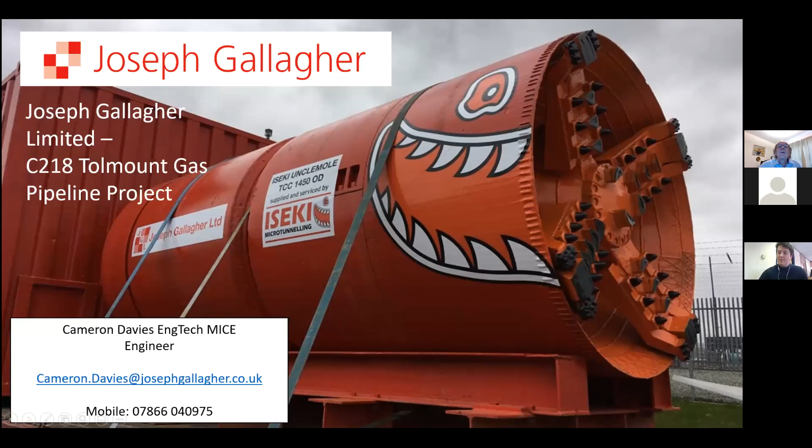Thanks, Norman. Hello, everybody. Thanks for taking the time to join this webinar today. We're going to talk about the Tolmount Gas Pipeline project up in Easington in Hull, and I hope you enjoy it. So just to run through the slides - a background of the project.

The Tolmount Gas Pipeline project is within the Centrica gas terminal on the eastern edge of Hull. JGL's package worked within a design and build contract with Saipem as our client, and Premier Oil as their client above for the main infrastructure. Our works were to install a segmental 5.5 metre diameter shaft down to 22 metres, and then there were 145 metres of pipe jacking at 1200mm internal diameter.

The works took place over 3 distinct phases. Prior to Christmas 2019, JGL undertook and sank the 22 metre deep shaft, completed and back grouted on departure. In March 2020, during the start of the COVID pandemic, we chose to continue and carry out our 1200mm pipe jack from the shaft, into the cofferdam out towards the North Sea, which was installed by others. Lastly, in January 2021, we finished the final completion.

There was a pulled pipeline in from the North Sea that we grouted successfully.

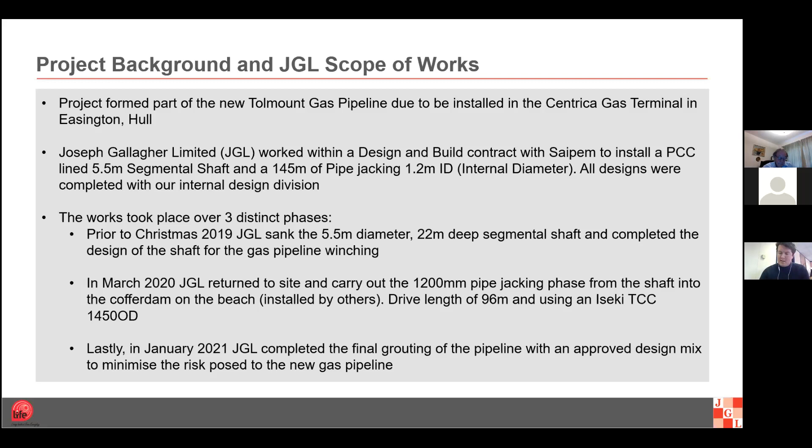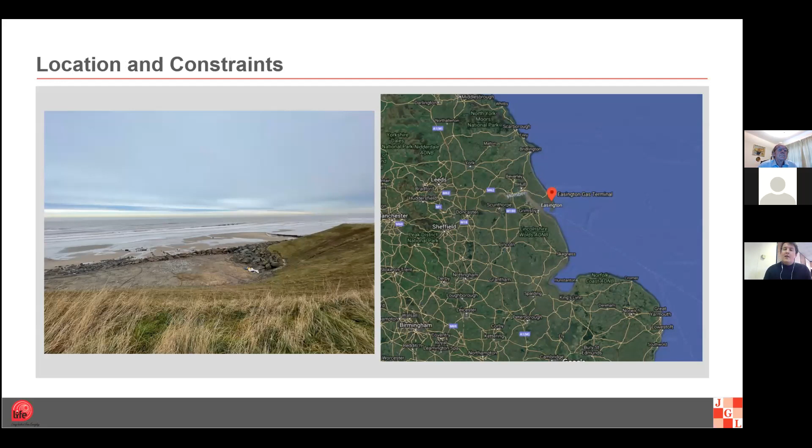Project location and constraints: the project was in Easington, 45 minutes east of Hull towards the North Sea. There's really only a single track route in and out of Centrica there, so logistics was a problem.

It was working within the Centrica gas terminal, which is a tier 1 COMAH site, so it's very looked after and disciplined. There were lots of inductions and restrictions on phones and anything that causes sparks. It was a very different site compared to what we normally do, so it was a good challenge.

There was a large permit system in place with Centrica, with a lot of pre-work for documentation and approval of the works. This was all completed by JGL and submitted to Saipem, then submitted onto Centrica, so there was a clear process throughout.

For plant and equipment, the electrical plant on site and anything used within the shaft had to be intrinsically safe. Adaptations to plant and kit, such as excavators, had the chalwyn valve and spark arrestor. This was an addition that our company, NRC Cranes, was able to retrofit onto the plant sent up for the work.

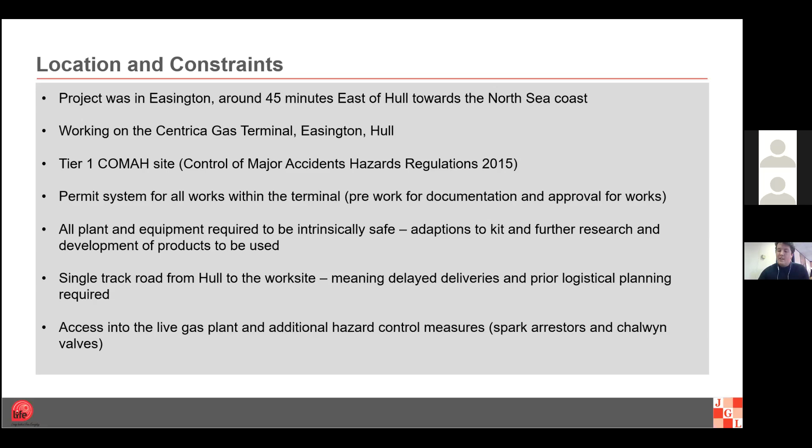As mentioned, there's a single track route from Hull to the work site, so deliveries could always get stuck behind a bus or something slower, which was a bit of a pain sometimes. The spark arresters and additional control measures for the COMAH tier 1 site were also placed onto our pieces of equipment.

The tunneling GI and design was all done by JGL's in-house design team, based in Leeds. The deliverables were the following four: the shaft design, including the collar and flotation, and the shaft sheave base block for winching of the pipeline.

You'll see in one of the photos the pipeline, which was originally designed to be winched from the cofferdam in. It was quite a size, the sheave block, as you'll see in the coming photos. There was also a backwall design for the jacking frame for micro tunneling, standard stuff within JGL, looking at the thrust forces onto the wall.

Lastly, we did very good work with the grouting specification for the mass fill of the tunnel drive with the product pipe within. This pour was completely underwater, so there was a lot of pre-work done to ensure and quality assure that the grout wouldn't displace when placed into the North Sea water.

These designs were all checked in-house, and we were able to offer professional service and advice to Saipem. There were a lot of technical queries and questions from both Premier and Saipem that we managed in-house, very much a full turnkey package in terms of design and construction.

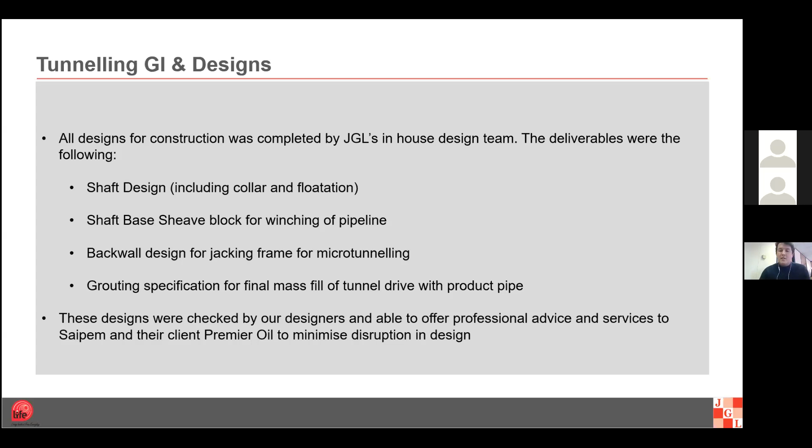Looking at the initial designs and GIs as a relative example: on the left-hand side we have our 5.5 meter diameter caisson shaft, with a tunnel slope of 0.7 degrees going down to the reception pit by others on the right-hand side, which was a cofferdam within the sea. Most of the ground was stiff to very stiff clay.

At the last bit near the beach, by borehole 04, there were protection measures for erosion of the cliff placed in there. JGL managed to come up with a solution where we were able to miss the rocks that had previously been placed there to stop the erosion of the cliff face.

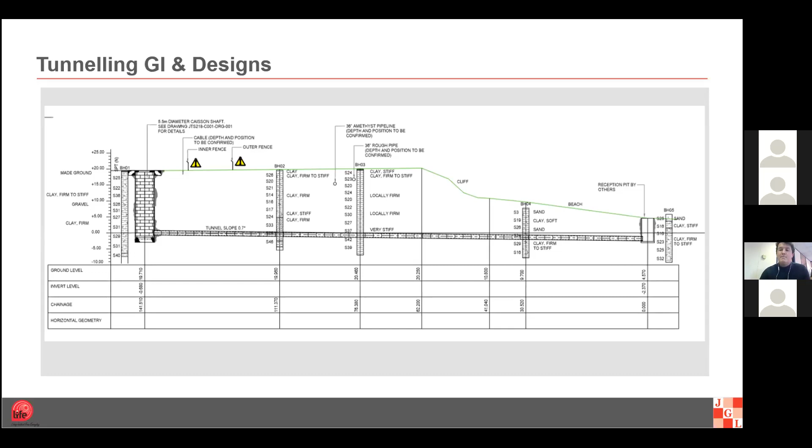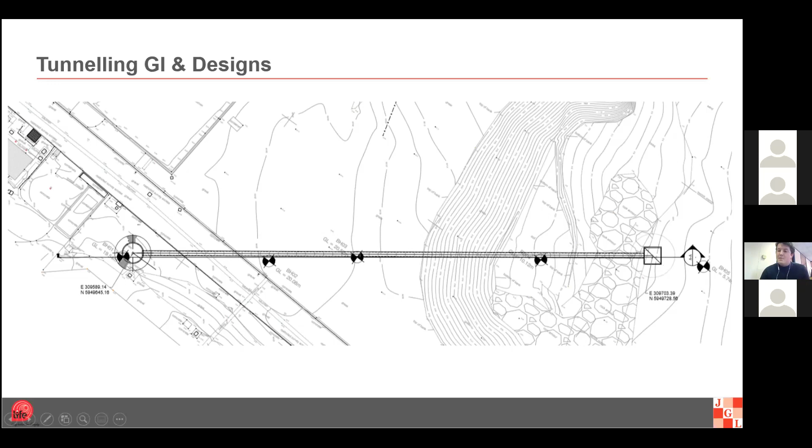Here's an overview of the tunnel drive itself. On the left-hand side is our drive shaft within the gas terminal, with 2 layers of fence either side for security. You've got the layout of the boreholes going all the way along to the beach, and on the right-hand side you can see the rock armor we looked at during our designs, along with the cofferdam that was placed in there.

So TBM selection was all in-house within part of the JGL group. The TBM was supplied by Iseki Microtunneling, and the TBM of choice was the TCC 1450 OD, which is an Unclemole micro tunneling machine.

The TBM was chosen due to a large amount of stiff clay within the drive geology. It wasn't a rock face machine, as the ground wasn't found to be hard enough to warrant one. That's why we had to look at the rock armor at the end, but we made the decision that it wouldn't be any issue to the drive.

One interjack system was designed into the drive to push around halfway, just to give it the final push to the end on the 96-meter drive length. As part of the JGL design process, the settlement analysis was designed and checked.

There was also the third party work with the cliff and going into a cofferdam, done by others. So there was good collaboration between the whole project, between all involved, and also the external contractors doing the cofferdam for Saipem.

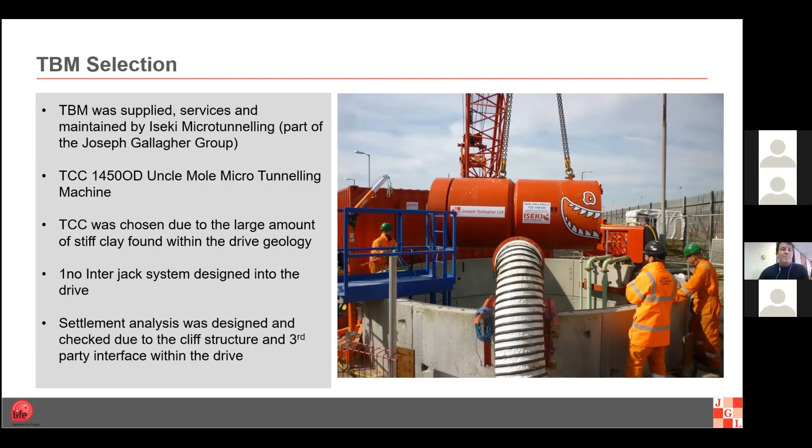There's a nice photo of it looking very clean on the way into site. It didn't look like that at the end, I can assure you, but it looks very nice in our photos.

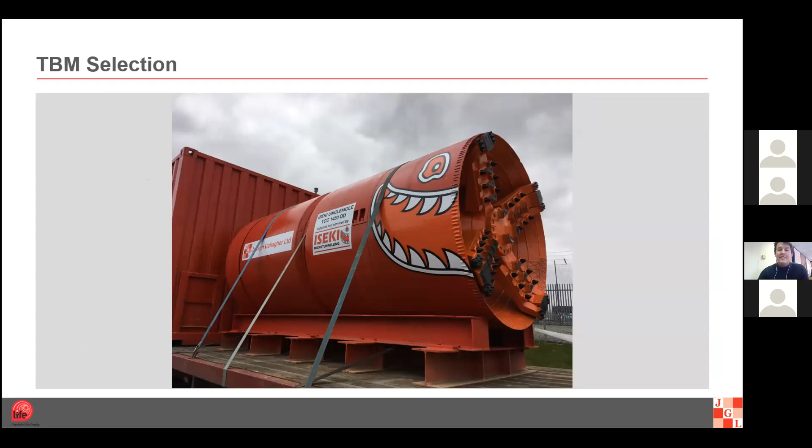The main shaft was dug using JGL's 34-ton telegrab excavator, which you'll see on the next slide - you can just see it in the top right-hand side of the photo. That was able to extend right down to the 22 meters depth, and then it was bottomed out with a 5-ton excavator to get the under ream for the sheave block.

Install of the sheave block was part of our shaft works originally, so in 2019 this was part of our works. All the shaft sinking equipment and cranes were provided by Specialist Plant and NRC, all part of the JGL group again, so it's all encompassed within one.

We provided everything from our own. NRC was able to retrofit chalwyn valves and spark arresters to suit on site, which saved a lot of time and effort with going out to externals. We were able to do that in-house, which is very good.

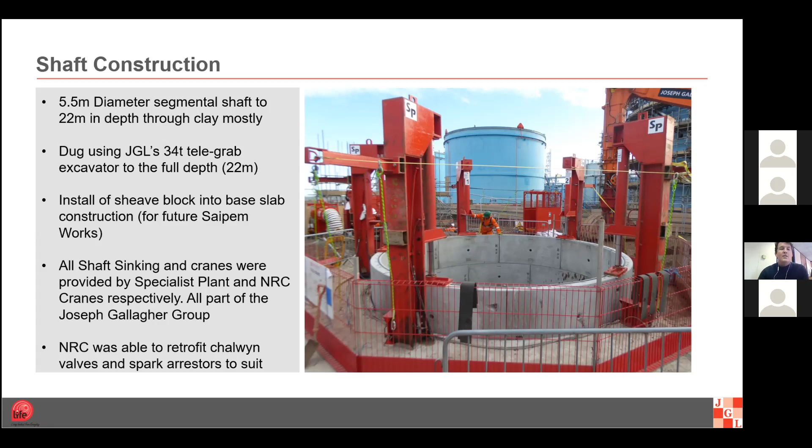On the left here, it doesn't really do it justice, I must admit - it was much larger when it was in person, I can assure you. So that was the sheave block there.

This was the initial frame that the winch was going to be installed upon. On the right-hand photo there, the top plate's been taken off - there was another plate to go on top of that, cast within the slab. That was a design done by JGL in-house again in our Leeds office.

The 2 I-beams shown across were designed for the 550-ton pulling force used within the winch. Believe me, it was a very complex task lifting that in - I think we had about 20 mil either side of the shaft as it was lowered. So it was a very complex task, which we were very successful in doing.

Again, that was all an in-house design, so it's very different from the norm of putting a sheave block into one of our shafts. But it was good, complex, and we worked with Saipem and Premier Royal to do this design, as it was of such importance to them.

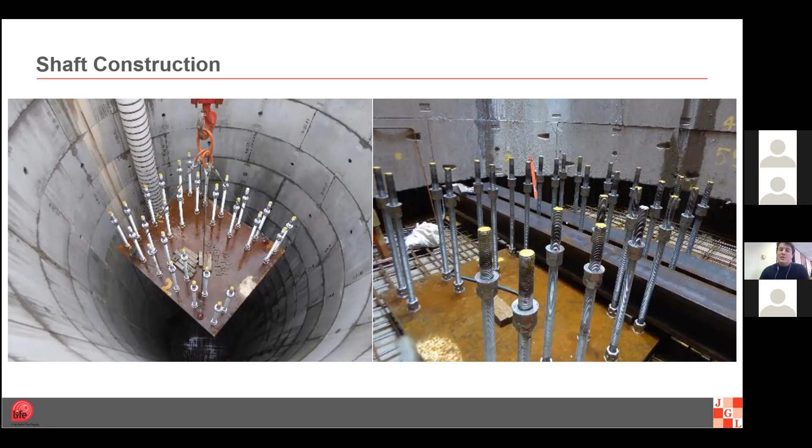On the left-hand side there, like I said, we used the telegrab excavator - that's it there digging. We did find some water within the shaft digging, but again we were able to near enough dig the caisson dry, which is good.

On the right-hand side there is the installed sheave block, or installed plate for the sheave block, that was going to be installed by others. Ace Winches were there for Saipem to install that.

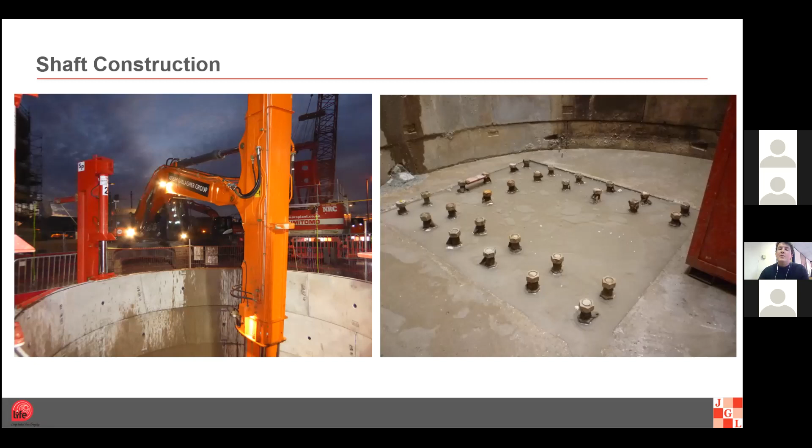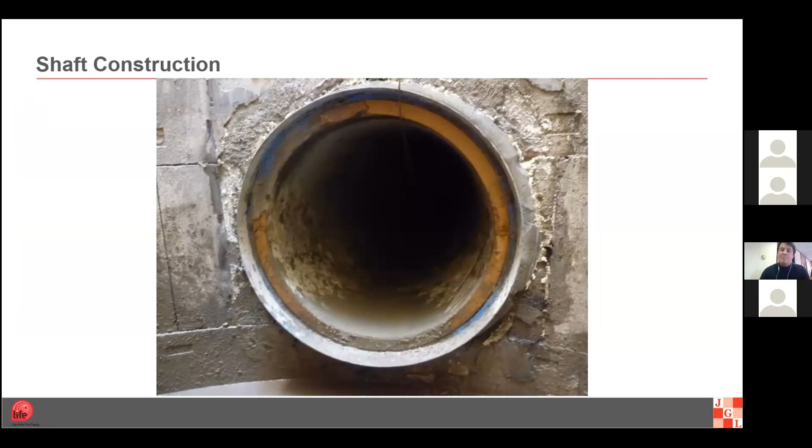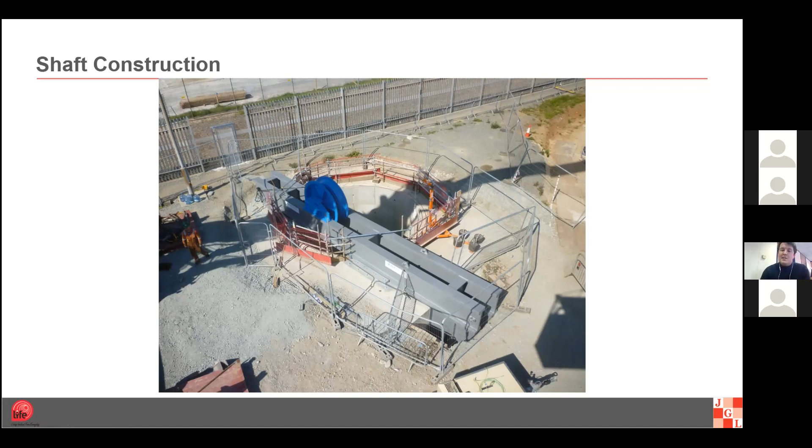That's the top of the sheave block installed. That runs right the way down to the bottom, as you'll see on the other photo. We also installed the two edges here for Ace Winches, off the side of the collar. We designed them for Saipem, so again we were an all-encompassing package. We were able to design all their pulling systems, and Ace Winches were able to install their own equipment.

This is the pipe from the outside looking up. This is the initial work that was done by Saipem to install the pipe into the chamber within Centrica. Adjacent to us, there was another contractor working to do all the receiving parts. We were only due to do the shafts and the tunnel, getting the actual pipe from the North Sea into Centrica's terminal. These bits were completed by Saipem's specialist contractor.

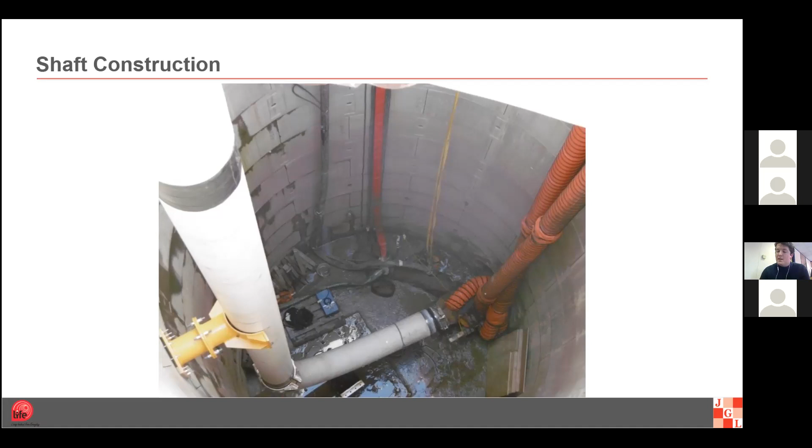Some problems we found, or things we overcame: due to the compound setup and restrictions within the compound, it was very strict on plant in and out. It was very hard to make space, and our room was very limited. So we did actually use a place on the outside - there's a little helipad just outside within the car park. We were able to use this as a microtunneling area and set up our system outside.

Pipes are run - we got the pipes and the slurry lines pushed through some gates that were specially designed to have closer access to the shaft. This was liaised with Saipem, Premier and Centrica themselves. We were once again all working together for the common goal of completing this project successfully.

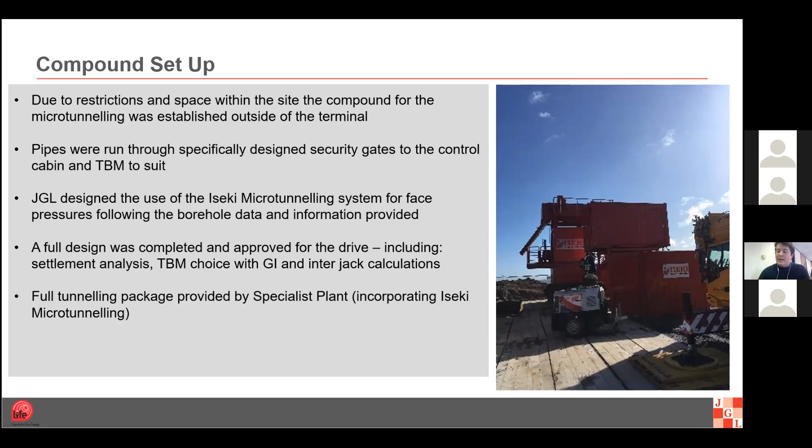JGL designed the use of the Iseki microtunneling system for the face pressures and everything - all that was done through our design. The recommendations of the machine went through the approval process within Saipem and Premier Oil. A full design was completed, and the full tunneling package - all the equipment, the TBM, the slurry systems, the primary and secondary - and all the plant was provided by Iseki and Specialist Plant, again all part of the JGL group.

Some construction challenges - the one at the top there being COVID-19. We started our microtunneling, I remember it very well - I was sitting in my room in Hull when Boris announced the lockdown. It was very much working with the unknown. There was a lot of uncertainty at the time, people wondering whether the world would come to a stop. We persevered though - we had a meeting and decided it would be best for us to continue. We were taking all the measures given by the government at the time, which was very successful. Suppliers was much of an issue, but we worked with it and were upfront and honest about what we had and what we couldn't get.

Another construction challenge was working with the live gas terminal. Like I said, it was a Tier 1 COMAH site, so it was very highly looked at. The MOD police were based nearby, actually opposite - we've seen them a few times. It was a place of national interest, as there would be a large amount of damage caused if the wrong person entered. So there were a lot of permits, procedures and different working conditions that we adapted to.

Weather was an issue with the crane - being that close to the North Sea and on the east side of the country, it's very windy, so there were a few days winded off that we had to work around with the cranes. Sometimes we had a smaller crane, our little 8-ton crane, that could work at a much shorter boom, so it wasn't affected by the wind. We were adapting with what we had.

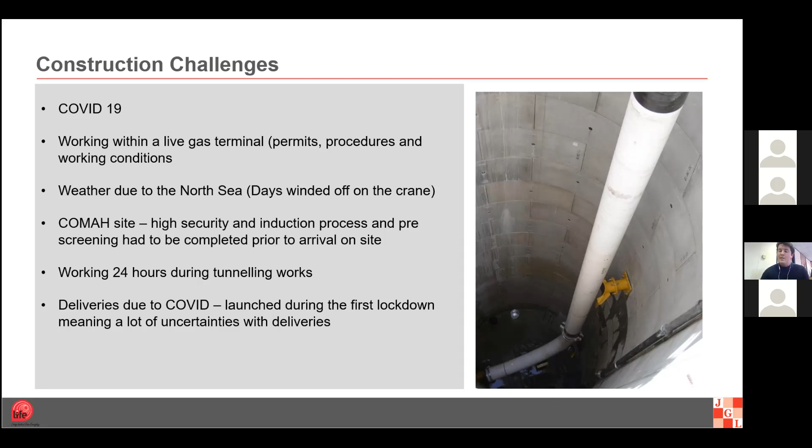So production review: we averaged 3 rings a shift during the shaft sinking phase. That was 3 rings on a 5.5 meter diameter shaft. So that's quite good going.

When we were tunneling, we averaged 4 pipes per shift, so they're 2.5 meters long by 1200 ID. Again, that was good ground to be tunneling in.

It was successful. Clay was found during the tunneling and processed through the primary and centrifuge on site. So the system worked very well with the ground that was expected. Everything was correct in the design. We did very well in that sense.

There was no water loss during the whole drive as well, so the water tank never actually fell empty. The water was kept through and recycled through the centrifugal system.

And lastly, when we poured underwater for the last part, when the product pipe was in our tunnel, we poured 82 meters cubed of specially designed grout within 2 shifts.

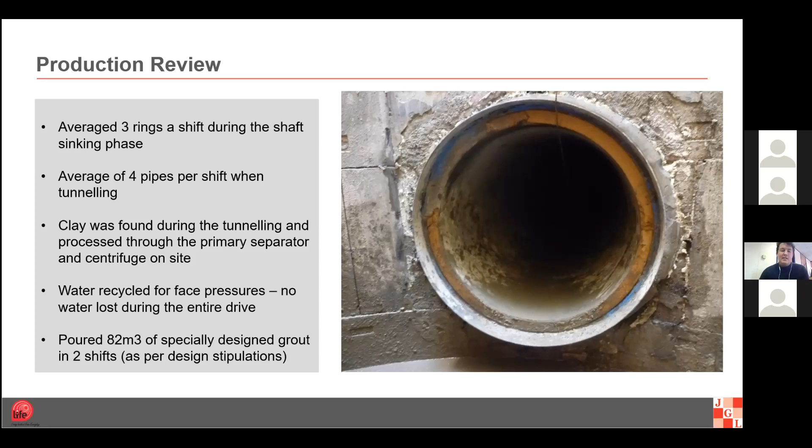Like I said, this went through many design phases and checks with Saipem and Premier due to their product pipe being very highly sensitive to anything. So we had to make sure that it was designed well.

So production review on the grouting works. There was a thorough design for the grout filling of the final product. I can tell you it was a thorough design. It went on for quite a long time, I'll say.

The grout had to be resistive. For the product pipe, JGL designed a specific grout that was poured underwater and provided resistance to the pipework itself.

We sat with a local supplier in Hull, but we worked with them collaboratively from the beginning. We engaged and developed with Saipem and Premier, so there were a few site visits to the plant to actually see how it was going to work. So it set a lot of people's minds at rest.

We were making sure that the product worked, and there was a task-specific method statement for the grouting due to the high nature of the works. The methodology was very detailed for all involved.

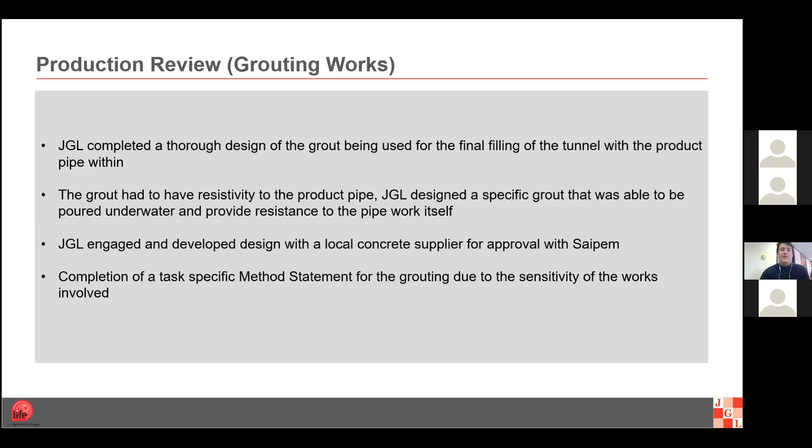That's just an idea of what was pushed. So we had almost like floats on the 4-inch pipe being pushed down the shaft. These pipes floated to the end. It was designed with an NRV, a non-return valve, on the end.

That was pushed around about 100 meters down the tunnel. Then we ran that pipework up to the top of the shaft and poured via a Camfaud pump. This was successful.

Obviously, it's not normally like that to be pouring underwater. This was through our design, and we found that the buoyancy on these were fantastic.

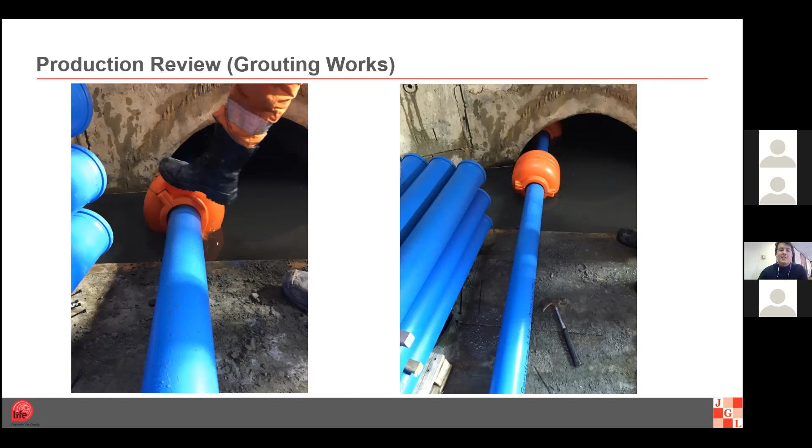That engagement came from a very early stage with a local supplier, and also the suppliers of the pipework themselves, to get their expertise and ideas on what they believed would work best.

This is a snapshot of one of our designs, showing how in depth our design for the grouting was. So the top left shows the plan view showing the pipework and the winch that was pushing it into the shaft.

That almost worked like a sort of catapult. It was pulled back and the pipe was pushed down with minimal force in the end. And that goes through the stages.

You can see in the bottom left photo, the red with the pipework being connected and pushed above the product pipe. You can just see it laying in the invert. On the right hand side, you've got the water coming back up, and that's where we pour. So again, we went into a lot of detail within the design, done in-house, which due to the nature, like I said, was very key for this all to be correct.

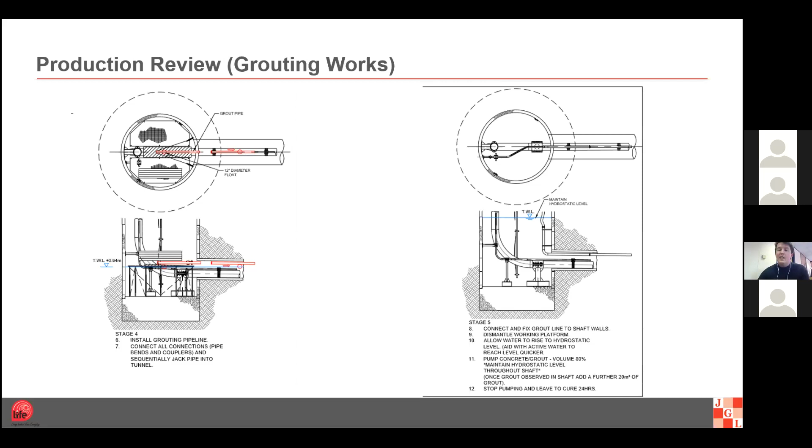So that was the main bulk of our works. Just to go into JGL itself, life was a key part of our business - living incident free every day. It's a key nature of the business and within all of our sites.

We had regular site meetings and workforce engagement which was completed. We always ask, was there a better way to do things? Obviously some designs there could be better ways of doing things, so we asked the question to the site and the people doing it - full engagement from all.

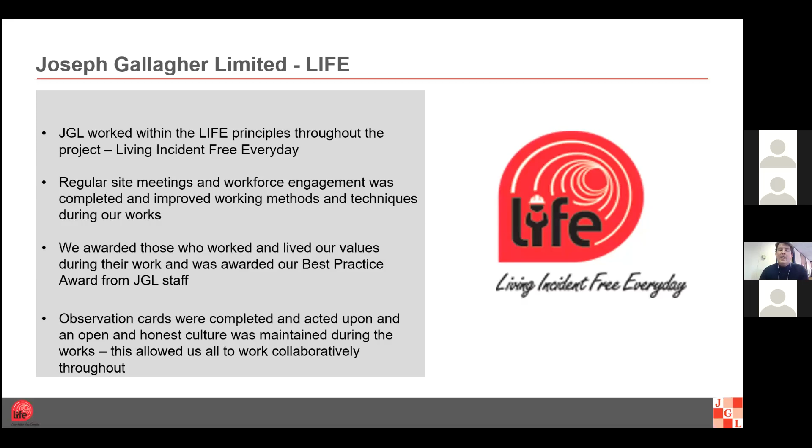We understood it was very new to a lot of people, including myself - I'd never worked within a gas terminal prior. So it was getting people's ideas on what was going wrong, what was going right, and ultimately making our visits very successful.

There's some lovely photos of me through the years. I've got a bit of a worse haircut now, I must admit, compared to them.

So obviously those are the awards we get - a £50 Marks and Spencer's voucher for the operatives that are picked. You can see everyone smiling, pre-COVID anyway, I can tell you all these photos were taken. So yeah, it's rewarding the workforce and noticing good works, maintaining a good working culture within our team.

So in conclusion, JGL was able to complete all the specified work for Saipem - just to go back, that was the shaft sinking, the tunnelling to the cofferdam, and the final grouting and install of the winch sheave base at the bottom. Obviously the grout was completed underwater.

We maintained a strong relationship with the client, and our knowledge and experience meant we were able to overcome various issues arising in a timely and ultimately safe manner, which was key throughout the whole project - being a project that was safe.

Our life culture was driven throughout the project, meaning operatives were rewarded for safe working, and there were actually no incidents within the project, which is ultimately a very big positive.

And the JGL group itself worked collaboratively as a full package. We were able to use all of our divisions within the JGL group to make this project a success.

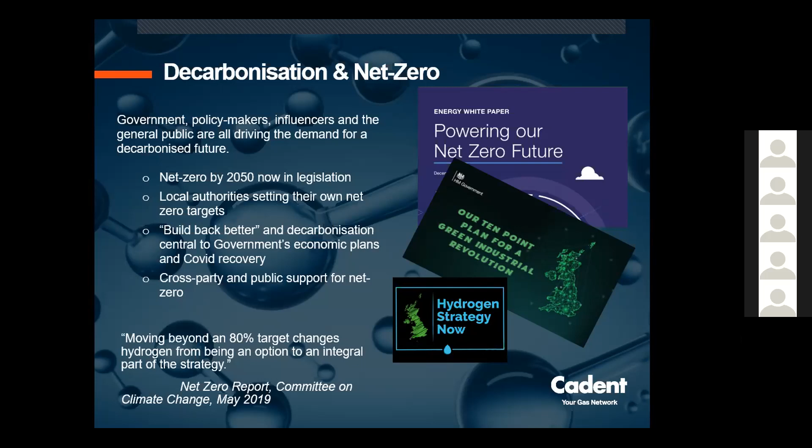So what role do we have in this transition towards net zero? What we have today is a significant asset and a means to distribute large volumes of high quality energy. Within the UK today we have over 280,000 kilometers of gas distribution networks, and we transport 720 terawatt hours of energy to consumers. What's interesting is that in the UK, population growth is predicted to double in the next 35 years compared to the last 35 years.

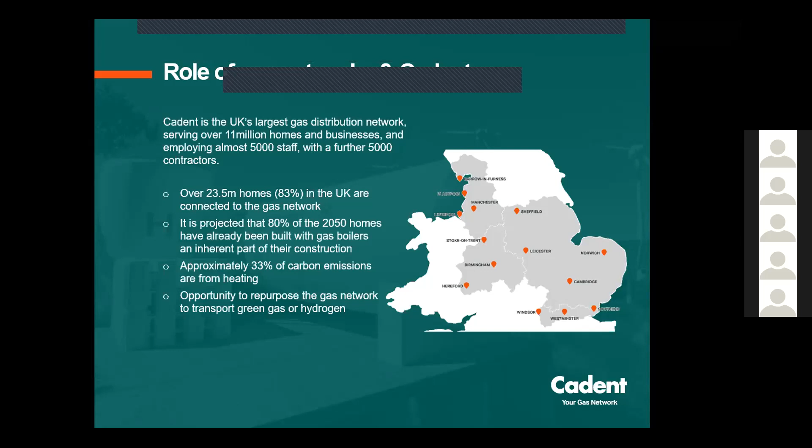In this time, 9 million more people will become over 65. So we're talking about an incumbent infrastructure able to transport high volumes of energy, a population that's only growing and therefore increased demand for energy, and an increase in customers who could be perceived to be in vulnerable situations.

This introduces the energy trilemma, where we're trying to move towards a low carbon future, but we do need to consider things like resilience and accessibility to energy. To me that's the most important thing. Accessibility isn't just about physical access, it's also about the cost barriers to achieving this net zero future. The other thing I wanted to mention, in terms of our energy mix today, is that a third of all UK energy consumption is for heat, provided by natural gas.

And at peak demand, four-fifths of the demand is provided for by natural gas. So as you can see from these high-level figures, electrifying heat would require significant investment and expansion of the UK's electricity infrastructure, because the gas network currently supplies 6 times more energy at peak in the coldest winters than the electricity network.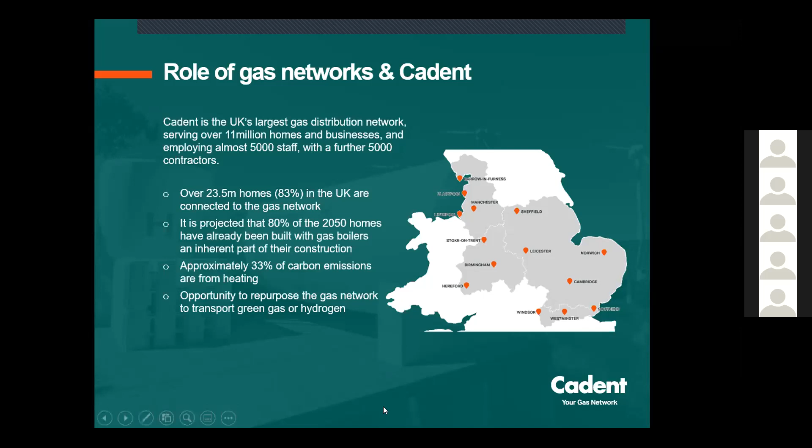So this is the point at which the high-level vision needs to be converted into a plan. We're at a bit of a fork in the road, and I think this is where we and our fellow engineers need to pick up that baton, to take the vision that has been created and accepted on the political agenda and start converting it into reality. This is where Cadent has started to develop close relationships with local authorities to identify what those roadmaps to net zero look like.

What's really important about these roadmaps is that they are energy agnostic. We're not being leading in terms of what the solution looks like, or saying that gas is the only future. What we're doing is working with the electricity distribution networks in our areas to provide local authorities with an unbiased, rounded view of what a net zero transition program looks like for them.

Currently we've completed a pathways project in Greater Manchester and Liverpool City. And only this month, the Mayor, Andy Street, announced a Pathfinder project for the West Midlands Combined Authority, and Cadent will be a key representative on that board, helping to identify what that path looks like for the West Midlands. I'm very excited about this project, but I think there are two things we need to consider as part of this.

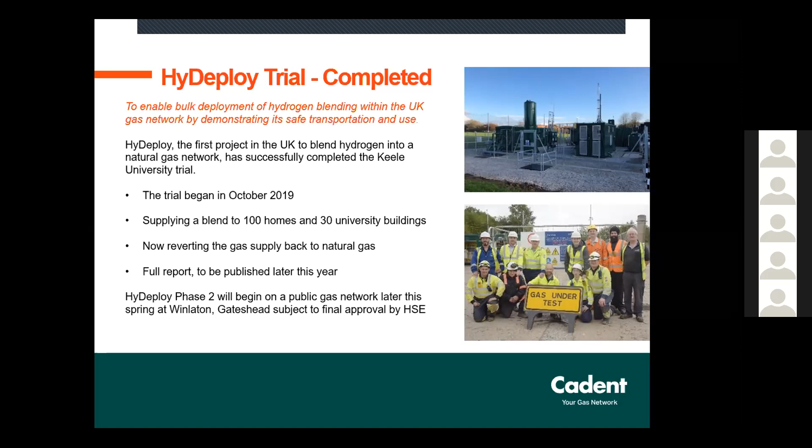And the final thing is we need to understand how we charge and recover costs for these changing calorific values of the gases that we'll be introducing into the grid. So that takes me on to the next slide, Kate.

So future billing methodology - this project, I didn't mention the Keele project. Both of these projects are funded by Ofgem through their Network Innovation Competition. The future billing methodology project starts to look at the makeup and calorific value of the gas injected into our networks to understand how we can build a much more granular view of gas content, to be able to charge customers for the energy content of the gas that they consume rather than the volume.

So although this project was trialed on biomethane, the concept could be applied more globally, and the idea is around modeling the zone of influence from a gas entry point onto an existing network, to understand how we can measure the calorific value of the gas content.

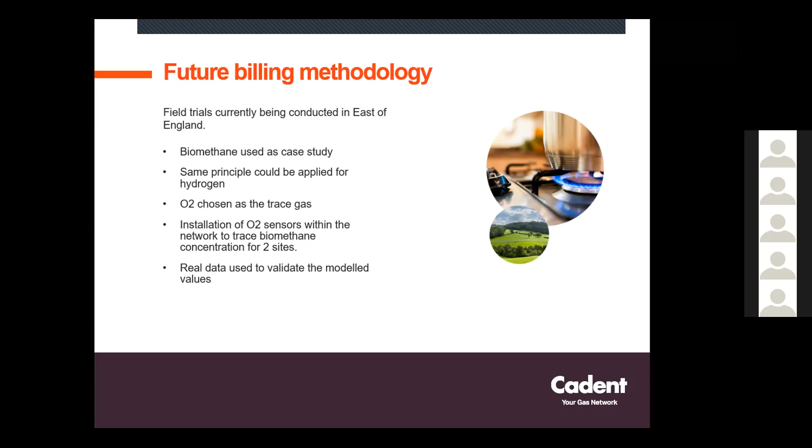Just moving on to the next slide, please, Kate. So I guess I just wanted to finish off with a couple of thoughts around what are we doing today, and what are the opportunities that we have today, because currently all gas networks are undertaking an iron mains replacement program, which means that we are converting our old metallic mains into plastic pipes that can safely transport higher hydrogen content.

So we have the opportunity to be very considered and focused on how and where we invest, to ensure that we build local hubs of plastic networks to enable that transition to a low carbon future. In the West Midlands, we will be replacing over 1,600 kilometers of metallic pipes over the next 5 years.

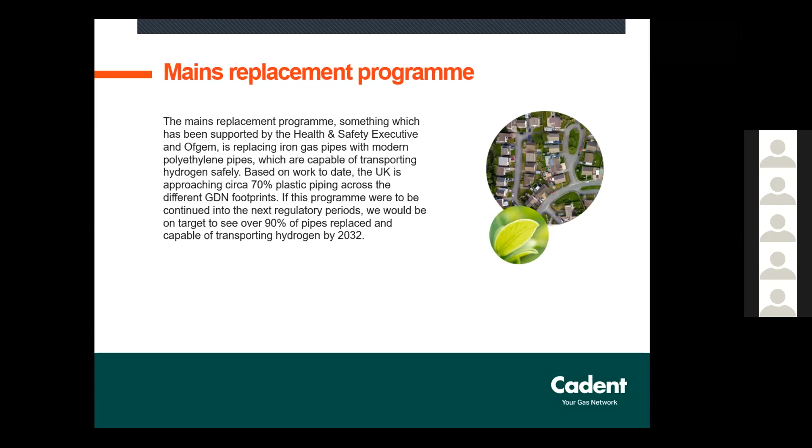If you skip onto the next page, Kate, you can see there. So in 2021 today in the West Midlands, we are 70% plastic. Over the next 10 years, we'll become 85% plastic.

So this is where it all starts to come together for me in terms of the asset management approach we take and where we invest on our assets, and how we work collaboratively with the local authorities in those areas, and, for example in my case, Western Power Distribution, to identify where is our future demand, how can we between us support from our infrastructure.

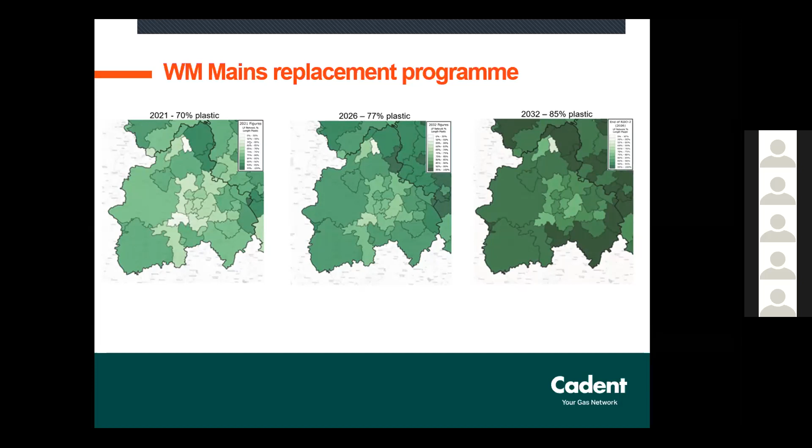And therefore what is the best way for those communities to transition to a low carbon future. And on my final slide, I will end with a quote, which is one of my favorites at the moment, which is, 'Change is not necessary because survival is not mandatory,' which resonates for me very much within the gas industry. So on that note, Norman, I'll hand back to you.

Okay, thank you very much, Kate. Again, a really interesting presentation, and I'll just now have a look in the chat. We've got one question so far, and that is, are Cadent planning to convert mains transmission lines to plastic?

So at the moment, there's a project which I didn't mention, which is HyNet, which is about building a new transmission line up in the northwest, and that is about connecting industrial clusters, so connecting the sources of hydrogen generation. And I believe there are plans, if that project is successful, to look at how we expand that outwards. But at the moment, we need to understand the impact that increased hydrogen blend will have on our high pressure tier pipes. I think that will be quite important to understand first.